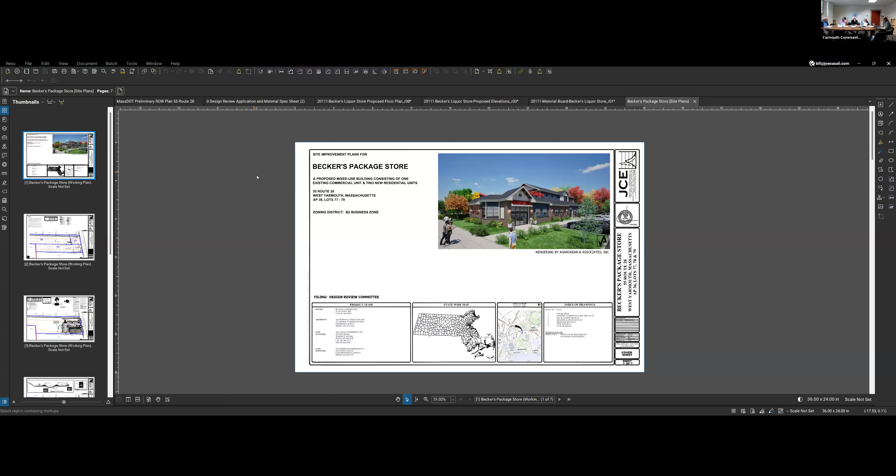You're doing perfectly fine. How do you know? I thought I did a great job, you getting it did, back yes, off, there you go Bill, all yours buddy. It's a little bit better now that I closed it. Are you seeing this? We're seeing the plans, but they're just kind of small. That's all perspective, which is okay. We have paper copies here. There you go, okay there you go. Yeah, is that better? Yeah, there you go. Okay, alright, because I'll scroll around. I just want to make sure you're on the right screen here. You're not seeing my email. Yep, it's your existing conditions plan.

Alright, perfect, so thanks for joining us today, thanks for accommodating us. We are looking to go over an overview of what's proposed. As I heard discussions, this is a staple in the area, Becker's package store. It is 3 separate parcels, lots 77, 78, and 79. And the existing structure is really pushed onto the eastern and most northern part of the site here in the front along the Main Street frontage, with associated parking to the west.

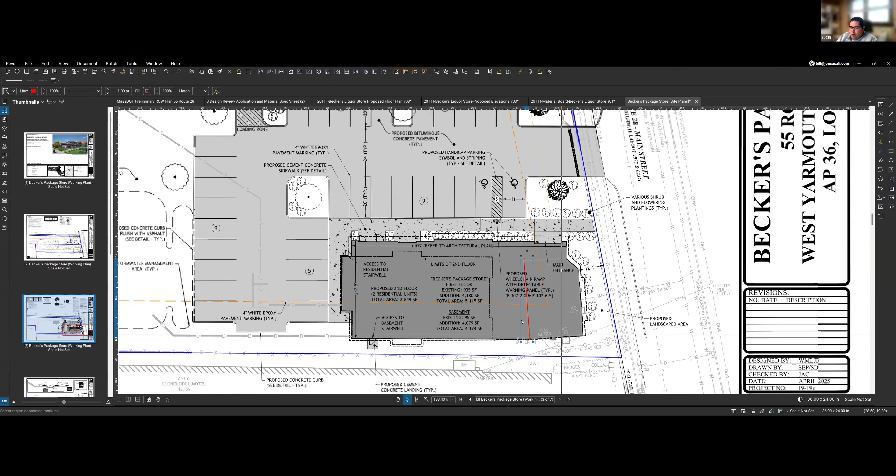So we are looking first and foremost to combine all these lots together, and we are proposing to put in a new expanded structure. Oscar will get into the architecture here, but basically the first floor is to expand out, you can see the limits. That's the back wall of the building. We're expanding the first floor for a larger Becker's package store and adding 2 residential units to the top on the second story.

With doing that, we propose some site improvements to complement this. We are proposing, it's a little different from the last time this was presented. We had some of the parking mainly along this frontage here. We've decided to change this a little bit just to provide better accessible parking access along the building edge onto the sidewalk. We'll create more pockets of landscaping along the frontage, have the core parking for the package store right on the side, with designated parking in the back for the residential entry.

We also are cognizant of the Mass DOT requirements. I have a plan here of the future improvements along the streetscape, so we obviously have to file a permit with Mass DOT, and we'll be working with them to modify that, and modify the curb cut, but keep in the proposed bike lanes and accessible access that they're creating on that future roadscape.

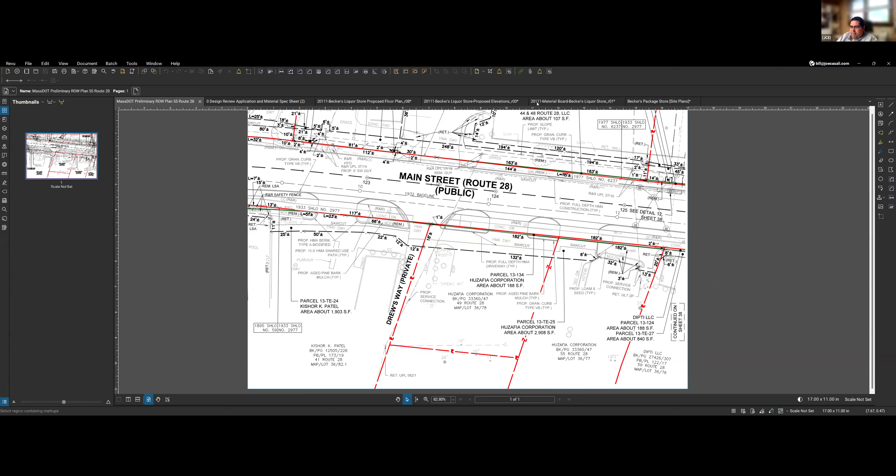Going into drainage, there's an existing low spot on the site that accepts all of the drainage watershed of what we're proposing. So we're going to keep that design point, funnel everything through some BMPs, some infiltration, sand filters, and bioretention areas, and have everything go stormwater-wise to the existing design point on site.

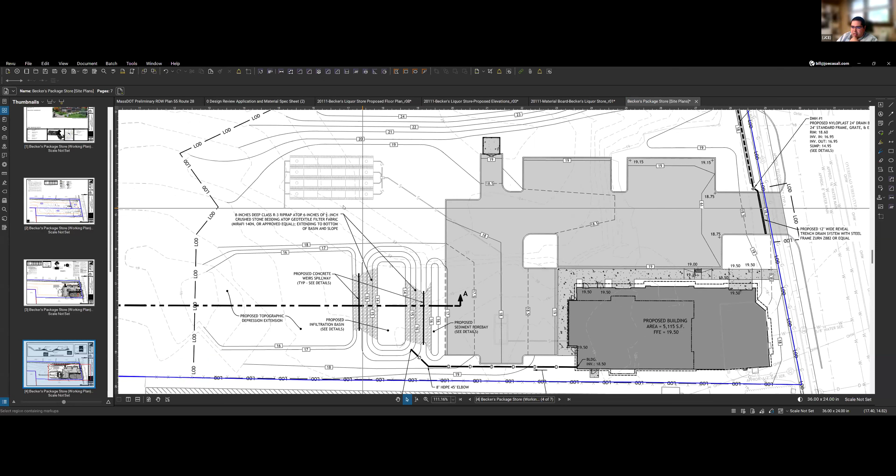We also need to have a trench drain and some small infiltration practice up front, as we can't put water onto the state highway. We're also proposing to upgrade the existing septic system. Currently it's just a very small old tank in the back.

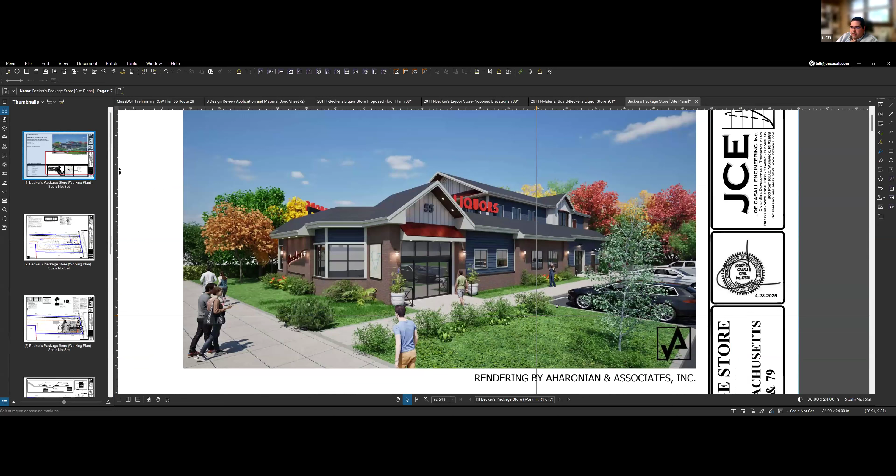We're proposing to move the septic to a new location and have it conforming to Title V standards, and that's really the extent of the site improvements. We're working with a landscape architect to, as we move forward with the Mass DOT permits and planning filings, have better command of the specific plantings. But we envision an evergreen buffer here, some street trees along Route 28 Main Street, and a lot of shrubs and flowering plantings around the building, shown in the nice rendering that Oscar has put together.

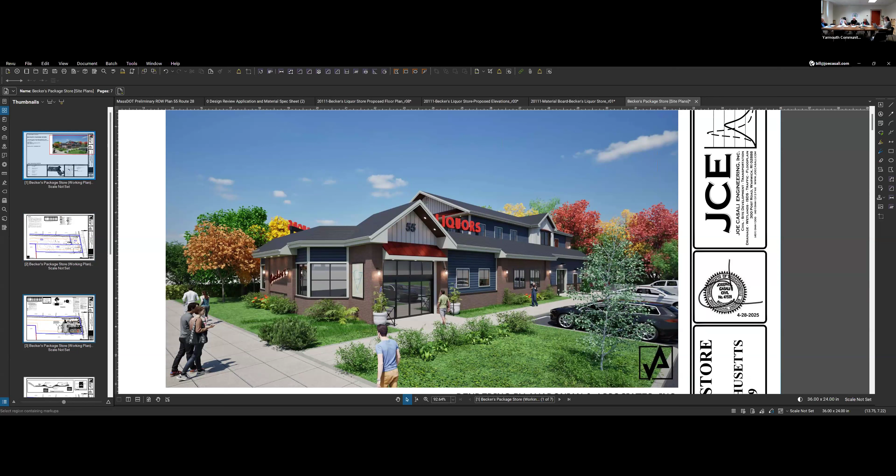I think generally the design and the site plan is good. I think it's got enough in-law trees, is that right? I think it might be a little short. They have 33 and you need to do 1 tree per 8 parking spaces.

So that's something you're probably gonna need to coordinate with the building commissioner on what would be considered. If you put a tree in, typically I say if it's in the parking area and you could have put a parking space there, but you put a tree instead, then that counts as an in-law tree.

We could probably, if you're doing a perimeter planting instead of a parking space, that's typically counted. So right now I think it's only what I would call 2 trees in the lot, maybe a third next to the loading area, if you put a tree there instead of shrubs. Absolutely, we have more parking than required, so we can certainly squeeze in some additional plantings. That's not an issue.

Any plans for the rear section of the lot? Not that I'm aware of. I don't know if Oscar and the owners can answer that, but not to my knowledge.

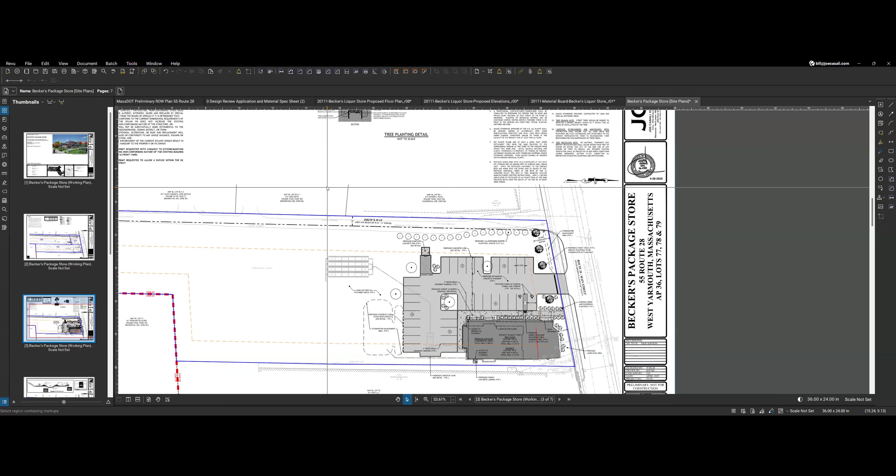Yeah, for this project, no, this is probably the extent of it. I think in the long term there could be some potential expansion, but at the moment we're just looking to expand upon the liquor store for business purposes, and then start incorporating some of that housing to help fulfill the need required in the town. But at the moment, I think we're just planning to utilize this portion of the lots.

So you're doing a redo and addition to the existing building, or is that going bye-bye? Essentially, we're trying to salvage the upper corner, really just because of how close it is to the property lines. That's probably the real reason why we're keeping that area and building beyond that. But essentially, we're trying to mainly add, about 5,000 square feet total, 4,000 square feet of an addition to the footprint.

Essentially, just for programming purposes, there is going to be a full basement added onto this as well, along with the 2 units on the second floor as Bill described.

Okay, my other concern would be considering this is a new build and there's plenty of room for it, regarding the evergreen buffer along Drew's Way. But Drew's Way, it's considered a road, right? Yes, it is a road, with houses back there. Being considered a road, it should meet the criteria for the trees, just as you put in the front on 28, and not just a small evergreen buffer type of thing.

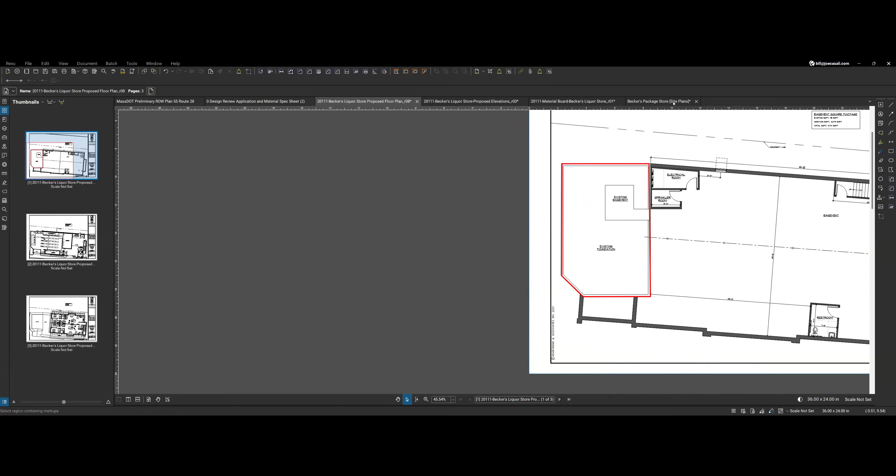Well, you don't need 10 feet there. I think you got that right. Maybe not, yeah, we're about 8 feet, I believe, from that property line. So we have 12 feet, 12.4 from the front property line. Right, and the rear.

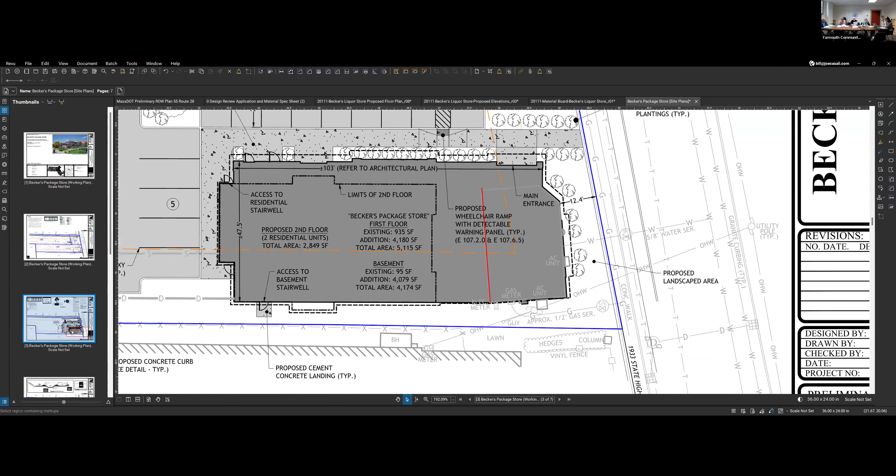Where we were holding, we're making the condition better than what it is. Oh definitely, yeah, so it's kind of scale-wise, but you can see it's... you definitely are, but when there's room to do something right, we love to see you do it right. Eight feet to the sideline, especially when the motel next door is so close on their end, which isn't your fault, but...

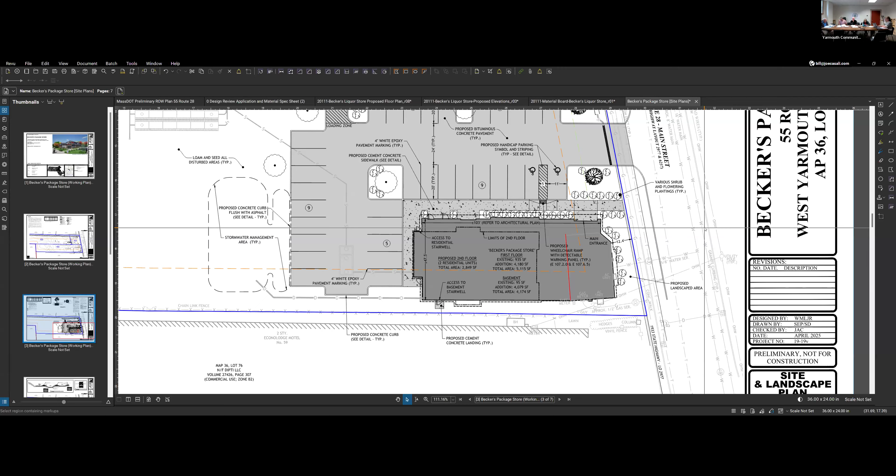I'm not thrilled with that, let's put it that way. Some changes could be made to that. That's something I'd like to see anyway.

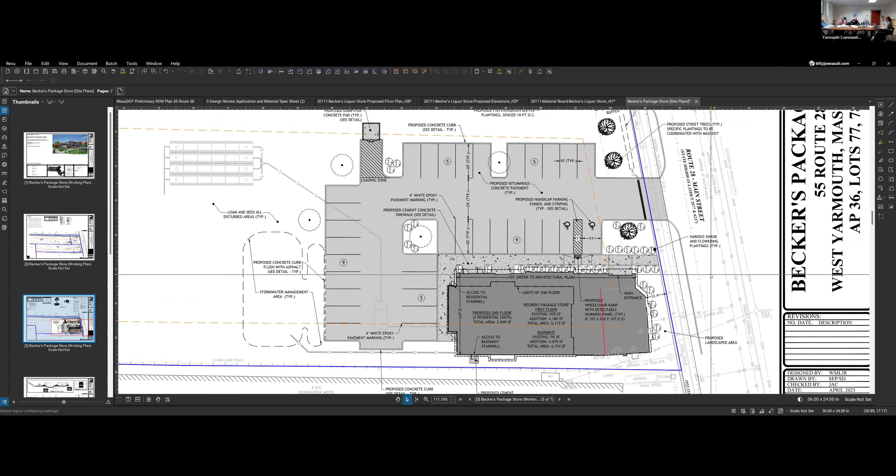Mr. Chairman, can I make a couple questions or comments? I guess my first question is, what parts of the building do you plan on keeping? That's what I was just going to ask. Very little. Can you show it? Is it just the front? Well, go ahead, show us what you're demoing and what was added on.

So essentially what we're keeping is the existing sales area, the part that if you've been in the store has all the racks now where you could browse for a sale. The idea was to try and keep the store almost open while we construct the back of it, likely in some sort of phased approach. That was the idea with keeping that front piece as well, so we can keep the store open while building along the back and into the basement areas and items like that.

So that was kind of the extent. In terms of existing square footage, we're keeping a little over 900 square feet, but the addition is a lot larger, around 4,000 square feet.

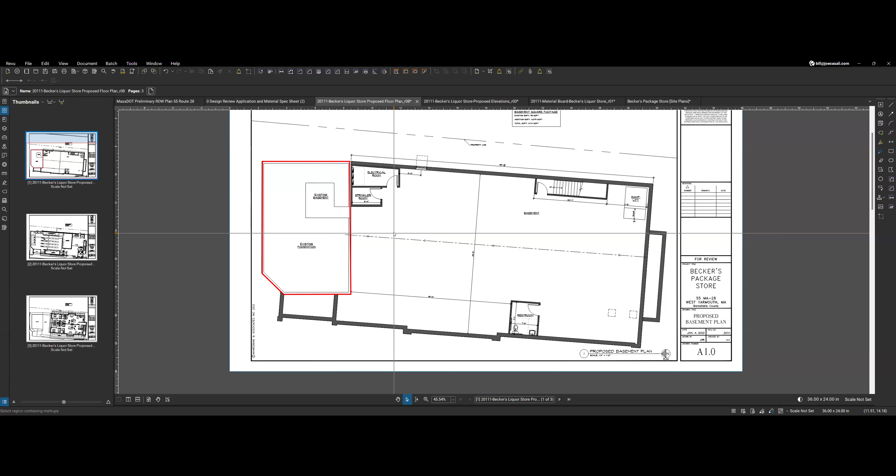I get it, they're keeping the building. I'm a little concerned with the setback. I kind of agree with Dick that if you could improve your setbacks, that would be a wonderful thing to have happen. I'm not asking you to tear down the building to get that setback in the front, but... Well, to get 12 feet, I think in order to comply with the recent setbacks, we would likely have to demo the entire building at that point.

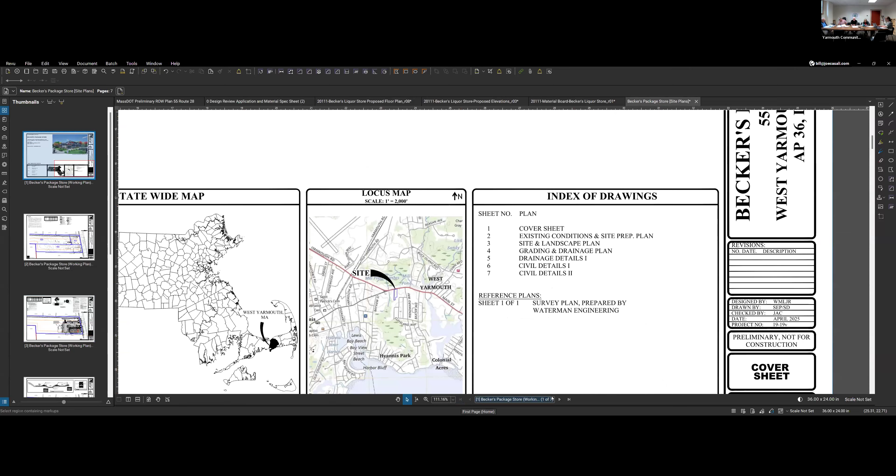Well, to get to the front setback, sure. I'm not sure about that - what would that be, so east, I mean side... So here, this orange line represents the zoning setbacks with the extent of the existing building. That's the 12 feet? No, the dotted line, that's the 20. That's right, okay, there, so okay. As you can see, they're substantially within the setback.

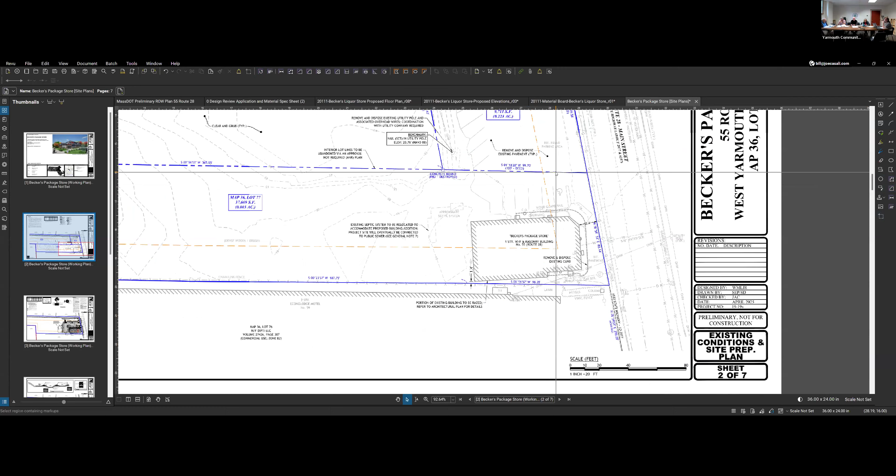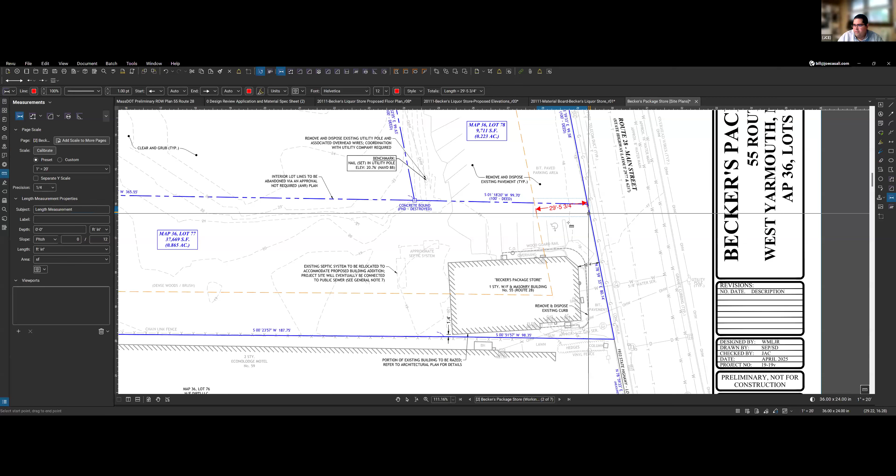Is the front yard setback shown 30 feet or 25 feet? Because you're a corner lot, so you have two fronts and two sides. Yeah, which... this is, let me make sure I'm showing the correct thing. Well, I'm sorry, I didn't measure it. No, it's not complying with anything, it's existing. 30 feet, that's a little off with that. Yeah, so the actual zoning is 25 feet for a corner lot in the B2 zoning district. Okay, all right, but we're still, yeah, we're like 15 feet into it, maybe even 20.

Yeah, the existing building is just so non-conforming in all attributes, so.

All right, well, those are my concerns. Others? Dick, if I could... Yeah.

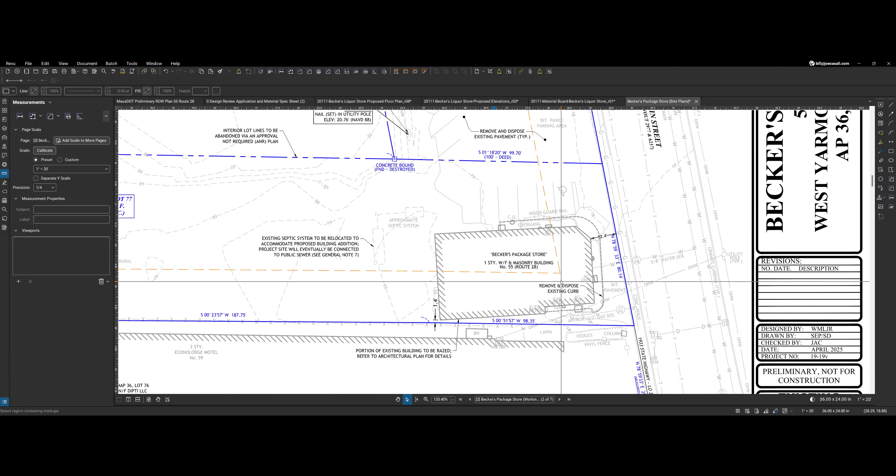So the existing building stays, a new one in the back - what are you using all the additional square footage for? We're using about 2,000 of the new 4,000 square feet to increase the sales area, so we can get more gondolas, more coolers throughout the liquor store, just to improve business. Then we'll utilize the remaining 2,000 plus the full basement for storage, because the store itself is just so small and cramped right now, so we're trying to improve upon it.

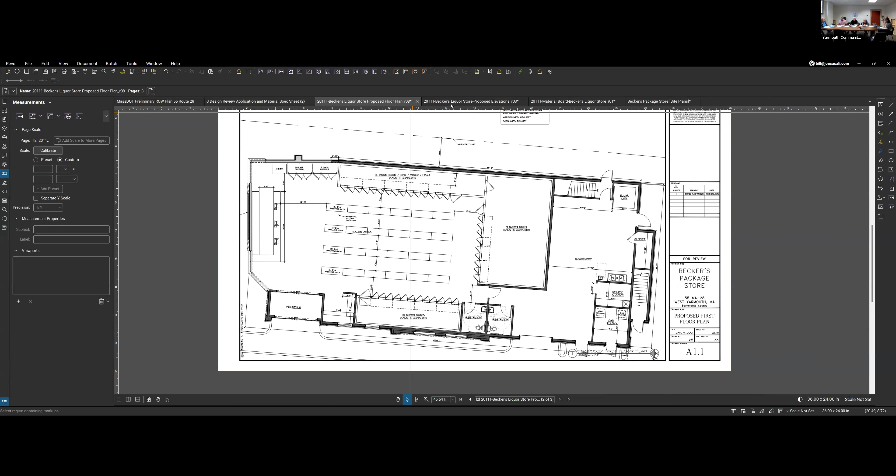Right, so we're trying to add an actual entry and then build upon the rear, and we would have to reskin all the existing material - remove the existing materials, do new materials - just to make it look more cohesive, like it was actually thought through, not just an addition to what's there. Gotcha.

My only other comment is thank you for staying in the town and expanding. Appreciate it. Yeah, of course, and I think that was kind of the owner's intention as well - I think they really enjoy the area, and I think they're grateful for their business and increasing upon it while also introducing some much needed housing, which I think would be helpful for everyone.

Kathy, you have anything to say? I don't have - I like the building. I actually have no problems with the building being so close to the front, it's always been like that. I like it just the way it is. That's all I have to say today. Thank you.

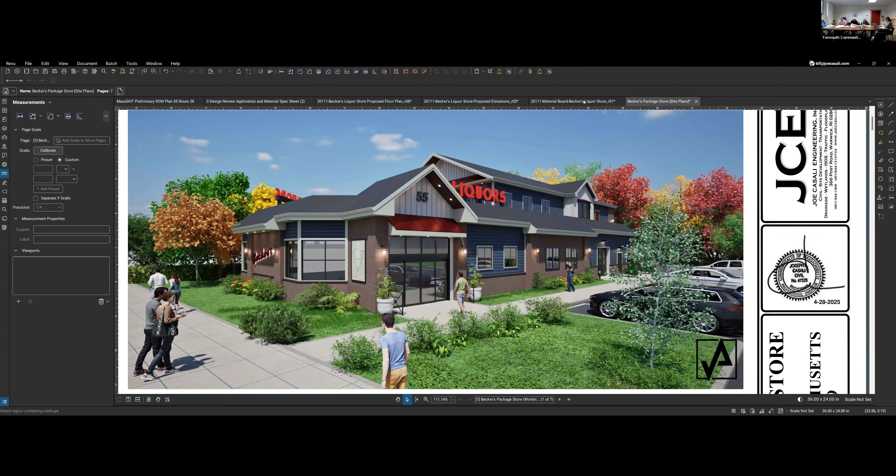Can I jump in? Just a quick question, again it's Jim. On your grading and drainage plan, sheet 4 of 7, and from my general knowledge of the area, it appears in your topography that everything slopes down from the road towards the buildings. Is there going to be any catch basins or drainage to catch water? Otherwise, is your parking lot going to flood when you get rain? Because it looks like it all comes down towards the building versus going away from the building.

Yeah, so we have grading pitched towards this basin here, but we've also graded the parking lot with a flush curb that'll take the water down and out to this basin area. We also have some catchment in the front here, a trench drain to pitch and catch the water there and infiltrate it into the ground.

In that top left, you'll notice the elevation drops about 6 or 7 feet from the road down to that area. We can scribe in some more definitive swales there to keep it away from the parking lot. I'm just thinking for your interest, because I visualize a lake in your parking lot if you don't do that. The building rooftop will be piped to the drainage area.

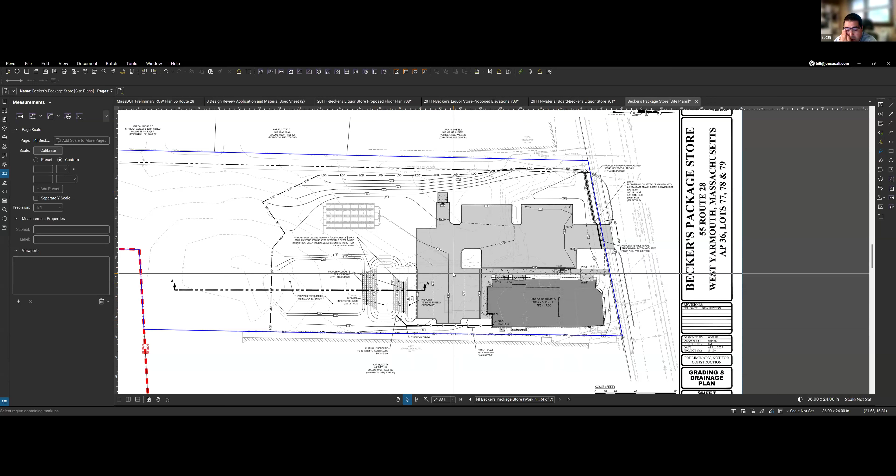That's it, that was only my question. Thank you. Anything else from anybody regarding that? All right, we'll move on to the building.

Where do you want to start, Oscar? I have, unless you want to take control of what you have, it doesn't matter. I don't know if I can, I have very limited options. I tried to promote him but it looks like it was denied. I can try again. I think that's what happened, actually. Sorry, that's all right, just tell me what you want to show and I can bring it up. He's gonna rejoin as a panelist. Okay, makes sense. Hopefully I didn't get rid of him. Sorry, okay, can you guys hear me? Yes, there you go. Okay, all right, we can hear you and see you.

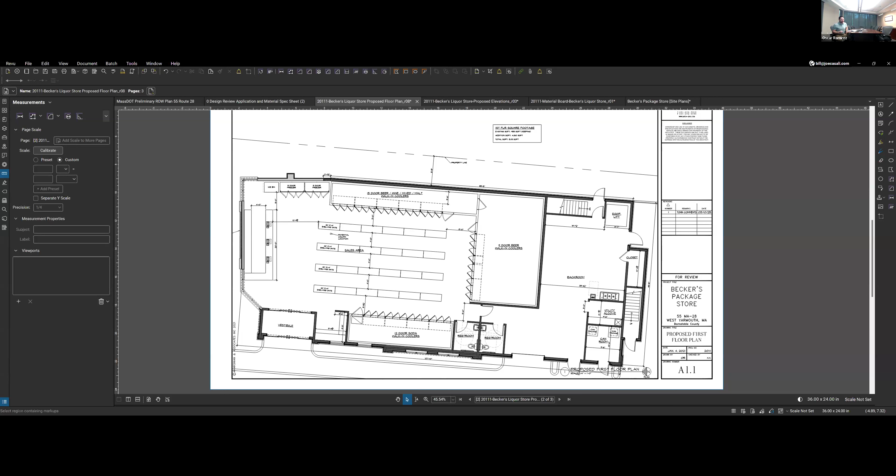All right Bill, maybe I could share and then that way I can just control the plan so I don't have to direct that. Sure, there you go. Okay, let me see. All right, let me know if you guys could see this, or at least you also have plans, right?

Correct, so maybe we could just start on the basement since it's a little bit quicker. There is an existing basement now, it's very minimal, really just for, I think there's just like a water heater down there right now. So the idea is, once we build upon this new addition, this 4,000 square foot addition, we would do a full basement.

Really just for more storage area for the liquor store, because they're in dire need of being able to store all their supplies and goods there. Down in the basement, there would be a lift that could bring things downstairs. There's a restroom and some typical utility rooms, like a sprinkler room and electrical room in the basement. But essentially it's just going to be storage areas.

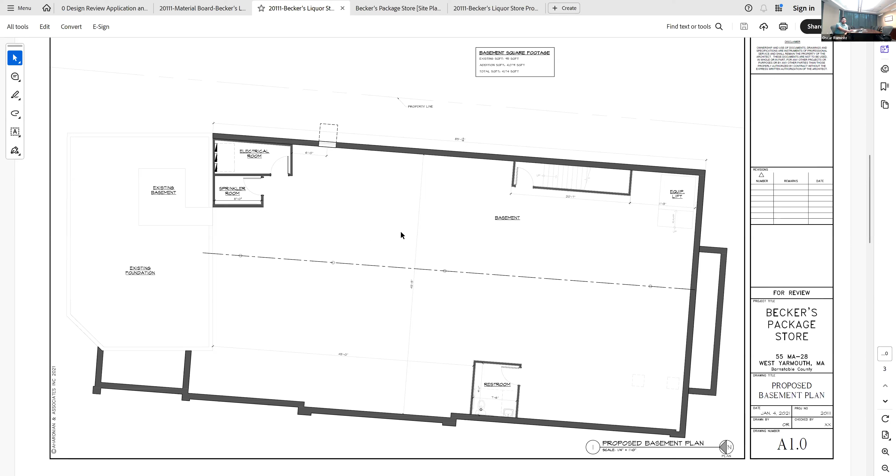Once we proceed upstairs, we would keep that existing front portion, that 900 square foot sales area, and build upon another 2,000 to 3,000 square feet, somewhere in that range, to do new gondolas, new coolers, and create an actual entry with a vestibule space, making it more inviting for all the users and a bit more user friendly.

Once we expand upon that sales area, we'll have a back room area where, as we discussed in the site plan review, we'd have a 3-bay sink and a sink in case there's a coffee station, which is something we're thinking about introducing in the sales area. There would also be a can room for can machines that would shoot downstairs.

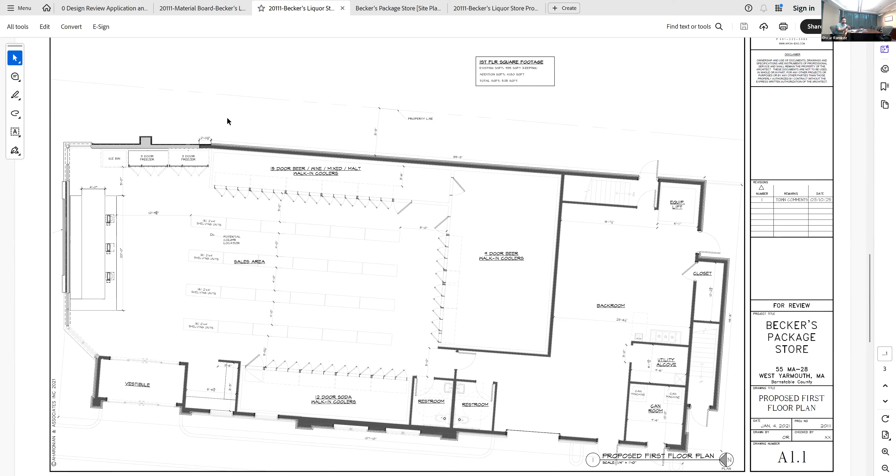Along the back of this 4,000 square foot addition is the stair entry for the units upstairs, separated from the liquor store for privacy. Ideally the tenants would park in the back of the building. Those stairs take you up to the second floor, where we have two units of about 1,300 square feet each, both 2 beds with bathroom, full kitchen, living room, and dinette.

I think in terms of the plans, that kind of covers everything. Do you guys want to break for some questions here, or do you want me to continue over?

I just have one question that really isn't in our purview. I'm just curious though, it's been a while. Are you only required to have one means of egress up there from the second floor? Well, yeah, but technically our bedroom windows act as a means of egress. Okay, right, just like a regular residence.

It's also a sprinkler building. Oh, it is. Okay, thank you. It's not our purview anyway, but thank you.

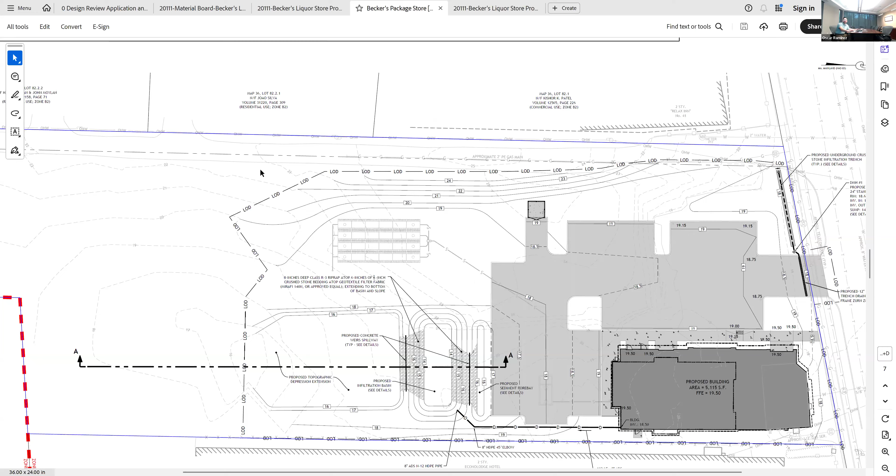There's no east view of the building, which would be... is that the east side? There's an elevation, but the elevations are labeled wrong on one of the pages. Yeah, we did have some elevations for the building. It got construed differently because of the angle, so some of them may look a little strange. I think this is part of where the rendering definitely helps.

But we could go through the outside just to talk about materiality, the materials we were planning on utilizing here. We're still trying to flush out specs. The page with the west elevation and the south elevation, they're labeled wrong. That should be north and east. Really? Yeah, the tags didn't change from the sheets, they just copied it.

So can we talk about the elevation? I can go back, again going back to our setbacks. I'm wondering why on the second floor we have that, I mean, we're already within inches on our setback, but on the second floor you have a jog in the living room on unit 1, which further puts you closer to the setback. So I'm wondering, can you eliminate that jog and run it straight down instead of having it get even closer to the setback?

We can on unit 1, yeah, definitely, just run that straight down the wall. Right, yeah, it's gonna back up to another building anyway. Talking about this one, no, he's talking about right there, yeah, on the opposite side, the one that's closest to the hotel. You're just gonna end up having... I think that was their attempt at having some modulation on the building facade. I get that, but it backs up directly to another hotel, you're not gonna see that. It's like gonna be an alleyway through there.

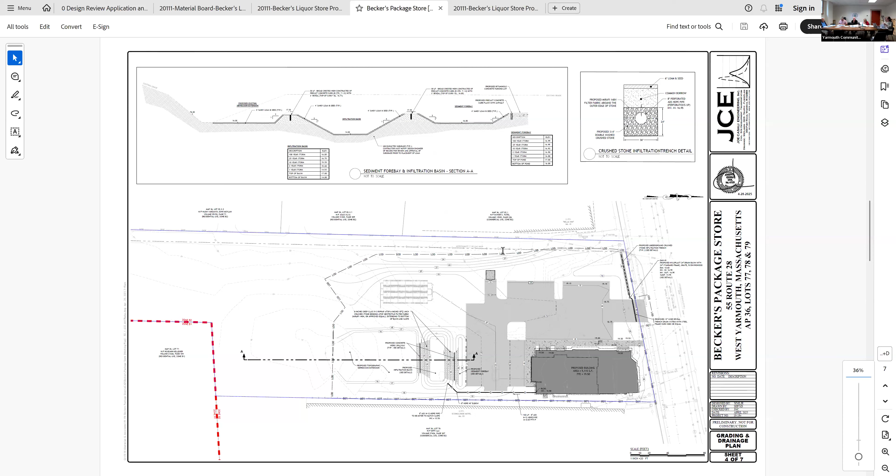Kathy, should that be 25 feet, that setback on the east side, or was it 10? The front was 25 and the side is... so that should be a side setback there, 5 feet. So the little orange line you had on the other plan wasn't correct, actually. It's just because there's that anomaly, because originally we didn't have Drew's Way represented as a true roadway. There's addresses that just have addresses off of Drew's Way, so it's definitely a way.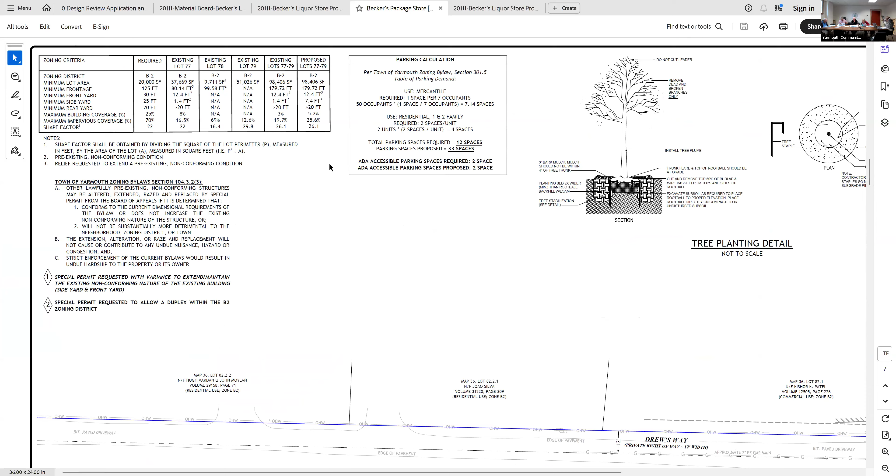Yeah, if you go the straight line, it's 8 feet 9 inches, but if you throw that jog in, now you're back into the 4 feet. So if you just run it straight, I'm trying to save you a few bucks and maybe a little bit less grief and aggravation with it.

Okay, yeah, I think that makes sense. Just run a straight wall, the tenant won't care. I think it was more just from a design aspect, we're trying to keep them as similar as possible, but yeah, I don't think it'll be an issue if we straighten it.

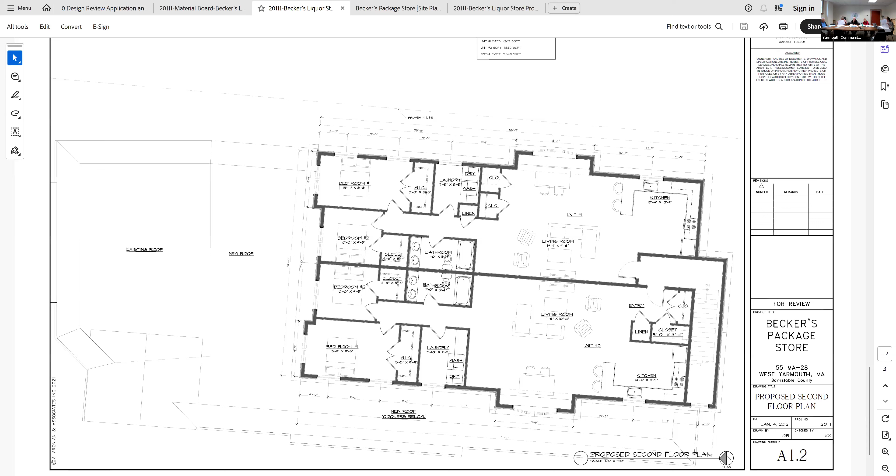I can appreciate the design on the west side where it's gonna be seen visually, but the east side, if my memory serves me, that's gonna be like an alley between the two buildings, the hotel next door. So why not just run it straight? You can change the materials though, right, like you're shown. Without cantilevering it, you can still keep the vertical, and keep the roof pitch, doing something with the roof. Right, yeah, we could probably just essentially grab that volume and pull it back into the main structure.

Do you have any issues with the close proximity of the abutting structure and windows? There is a calculation and we haven't really fleshed completely through it, but depending on how close you get to the property line, there is a percentage of openings that you're allowed, and it just depends on how close you get to the property line at that point.

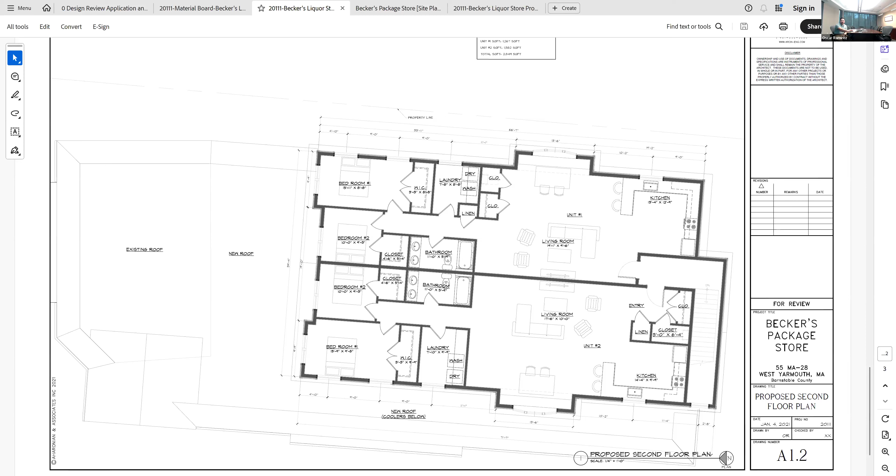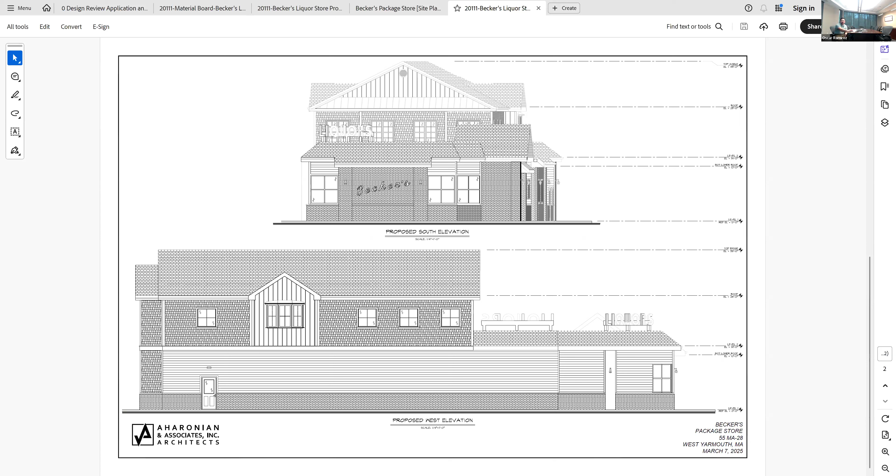I guess just to continue on the outside anyways, we could kind of talk about some of the materials that we were planning on utilizing. Maybe I'll pull up that material board, might be a little easier to follow.

Essentially we were gonna do a mix of a pitched and a flat roof. So obviously the sloped areas would have an asphalt roof shingle, a CertainTeed likely shingle on there. What you don't see on the rendering is, basically we were gonna utilize that mansard roof that's there and do a flat roof behind it.

We're gonna do a brick water table. It was gonna likely be a thin brick, and then accent the entry area with some of that brick as well, and some of the piers, as you can see, just to kind of help break up some of the materials.

Anyways, we're going with a composite material for the lap siding and the shakes. It's called Celect, so it's different from something like James Hardie, which is cementitious. This is a composite, so there's a whole lot less movement in it, and it's easier to build because it cuts a lot easier and installs a lot better and quicker than the James Hardie material. So that's what we were proposing, at least horizontal lap siding for the first floor, and then shakes up on the upper floor.

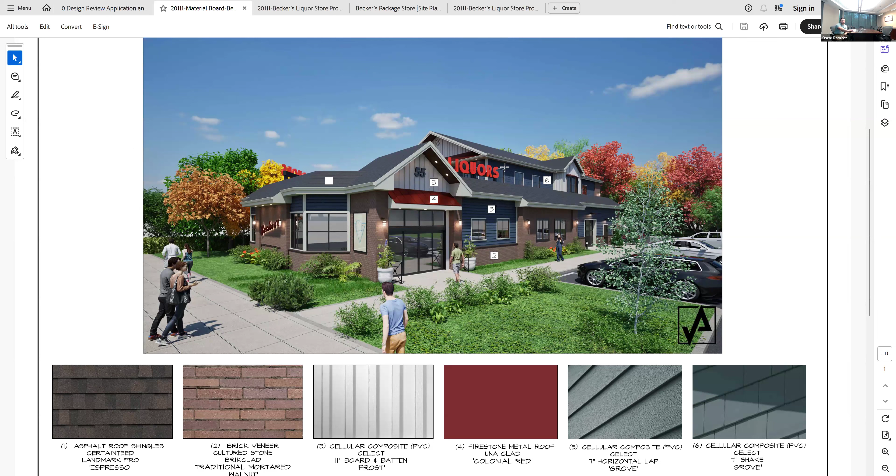It's a little hard to see in the rendering, but the upper floors have Celect board and batten, just to accentuate some of the entryways and the gable peaks, helping break up the materials. Then over the front entry and the bedroom windows there's a red metal roof, more of an accent to help play off the brick and tie everything together.

The liquor store signs are existing. The idea was to just remove them to do the new roof, install them back into place, and hopefully clean them up a little bit.

Do they meet zoning? He has two of them, so I don't know. Maybe, I guess the idea was that they'd be existing non-conforming because they're already there. We could double check with the zoning code to see how much signage would be allowed.

I think if there's two of them there and they're too big or whatever, that has to be looked at. I don't like it. You do?

I like it, yeah. It's a nod to the past, that's how I feel. It is, like when you used to buy Juicy Fruit gum. I feel like it's part of history. I'm assuming it's the original signage. I don't know that for sure, but to me it's a great homage to the past, in my opinion, but that's just me.

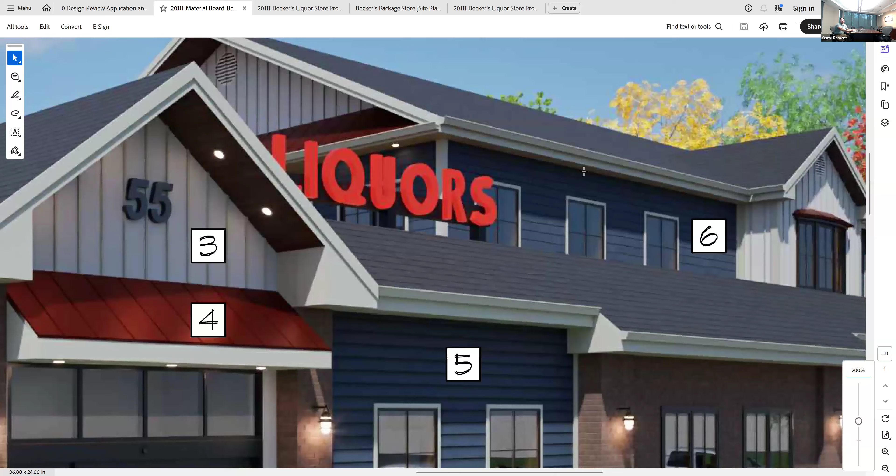The shakes are going on the second floor area, so it's a little hard to see, but essentially where those three windows are up above - oh, there you go - is where the shakes are. We could always incorporate more shakes.

Perhaps even behind the signage. Anyway, we could look at maybe reducing some of the brick water table, maybe go with a panel perhaps, or more wainscoting, kind of breaking up the brick, not necessarily all of the building.

I think that's kind of what - yeah. Like I said, I'd rather it look more like it belongs on Cape Cod than, I'll say New Jersey because I can't think of anywhere else, but less brick I think is the answer, but I'll yield to our architect's opinion.

Do you agree? No, maybe. It's funny, I was thinking about the brick and how I usually object to it, and for some reason I didn't. That's why I yielded to you, because I thought - I like the look of it, I thought it was different. But now I'm just saying it doesn't feel like what you want it to feel like, it doesn't feel like it should even be, though the sign is Cape Cod.

One of the things we've been trying to do since Dick and I were in junior high school was to try to change the image of Route 28. The road bylaw was one of them, so I'm just trying to encourage you to look at something a little bit more New Englandy.

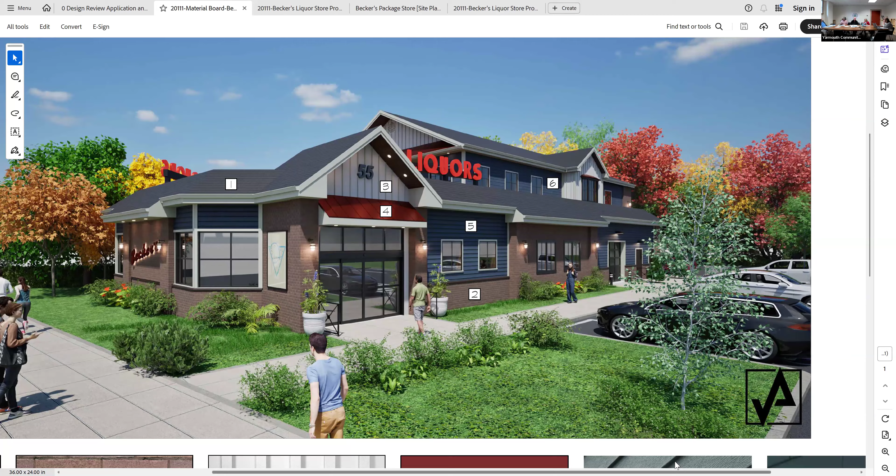So are we ready to go through? Yeah, makes sense. Thank you, by the way, nice work. So we're just going to go through the different siting and building strategies and identify issues or not.

I think the streetscape meets the standards, they've done a great job with it. And I really appreciate the improvements to the parking lot area and the reduction in the curb cut width, which was very all over the place there.

Tenant space is not applicable, it's not that big of a building. Defining the street edge, again, meets the standards - we like to bring the building up closer to the roadway with additional trees to help define the edge on the sides. Shielding large buildings is not applicable since it's not a large building. Designing a second story meets the standards since we have a second story.

Use of topography to screen new development is not applicable in this circumstance. Landscaping buffers and screenings meets the standards if the trees are 3-inch caliper native species and buffer plantings are located on the east side of the rear parking lot.

Okay, I'm looking at these - no, the east side, behind there? Yeah, all of them have trees there, but they need to be 3-inch caliper native species, which is what Dick was talking about.

The plantings here need to meet the standards - they meet the standards here, you don't need to have them in front of the building per se, but then they also need to have something here.

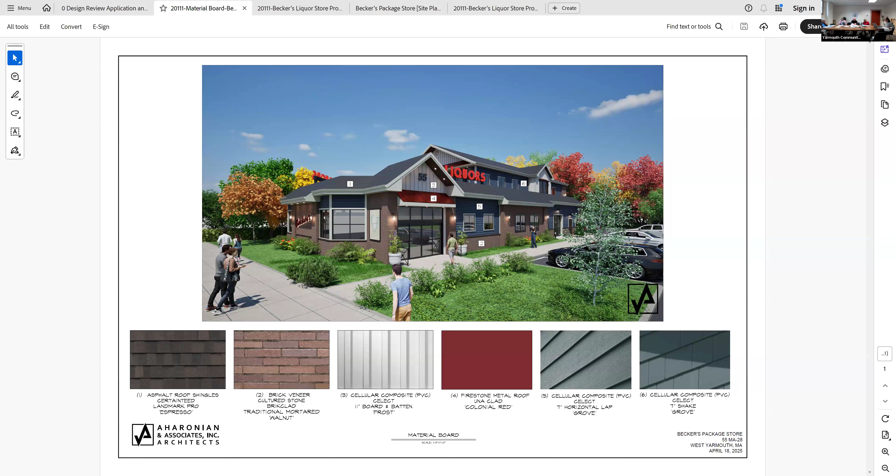The one question had to do with locating utilities underground. There's an overhead utility line that comes to a pole on your property that looks like it also services the Econo Lodge next door. I'm assuming you're not planning to underground the utilities, so I understand why you're not. We'll have to coordinate - there's a pole that comes in, and it looks like it's just site lighting.

But then there's a pole on the eastern side of the building that is servicing something else. So that would require coordination with the utility company to see how that's going to be managed, because obviously we have to keep appropriate distances from the addition. So we'll have to coordinate if that pole has to get moved and what happens there.

Is that just the pole on the opposite side of the street we're referring to? No, it's right to the east side of the building, right up against it. I'm looking at Google Earth quick just to see it. I have it up on my screen - I don't know if everyone sees it on my end.

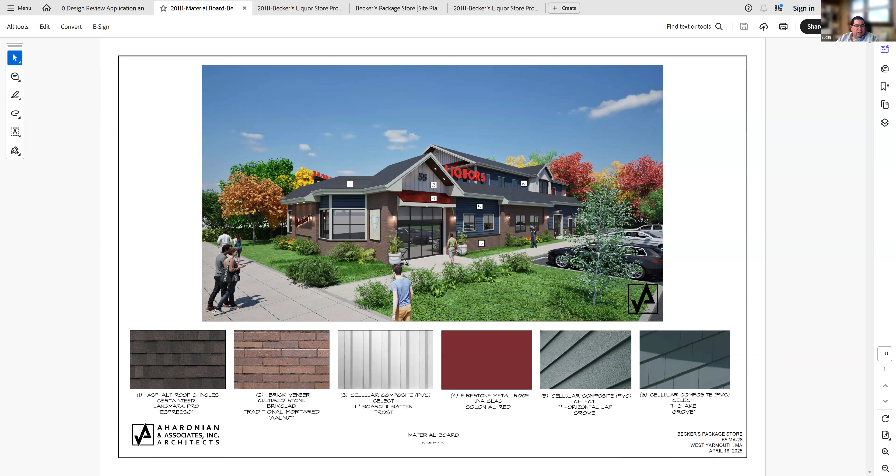We're still seeing the rendering materials. Oh okay, let me share again, hold on. I think, okay, here we go. Oh okay, that pole, oh.

I see the wires come across from the other side of the street - that's unsightly. Whatever they do is gonna look really nice, and I think that's a good visual, you can see the distance between the two buildings. Did you say you couldn't see the east elevation driving down Route 28? You can - you're gonna see the front part, and I think they've done something with the side. As you get back further, I'm sure.

We'll need to coordinate with the utility companies regarding location of the existing pole and investigate undergrounding.

These are new signs, yes. It could be very expensive, is the only reason I say that. Well what's there now does not look nice. No, it does not - lots of times that's the problem we ran into on another project, like this pole. You might be able to go to the pole and then go underground to yours, but you're also servicing an entire hotel off that pole, so some of these things might be outside their control a little bit.

Interesting, I think there might be some discrepancies on that one - just noting that we'll need to coordinate with the utility company regarding location of the existing utility pole and investigate undergrounding the utilities. Signage on the side there now too.